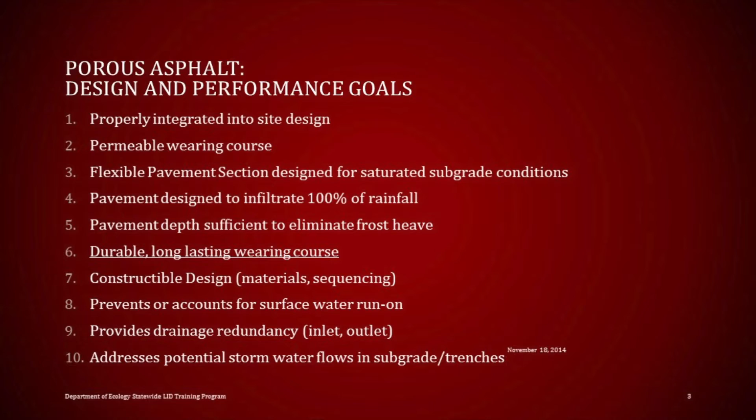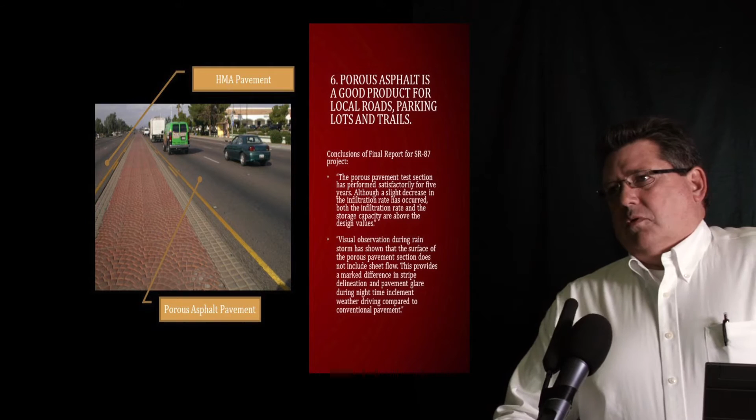As Curtis mentioned, mix design on porous asphalt has been a moving target and continues to be one. You're going to see information today that's only been presented one other time, as an example of how this keeps moving. In general, everybody's been pretty accepting of porous asphalt being a good use for local roads, trails, and parking lots. But we have an example in Arizona of a fairly high-volume highway using porous asphalt, and there are other examples in Texas and elsewhere where porous asphalt is used on high-volume roads.

As a note, this is from a report on this particular road at the 5-year point, showing they were maintaining the design porosity 5 years into the project. It was operating satisfactorily at the 20-year point. I don't know what it's been doing since then, but it was operational. If you notice in this picture, there's very little visual difference between either side of the road—one side is regular HMA and the other is porous.

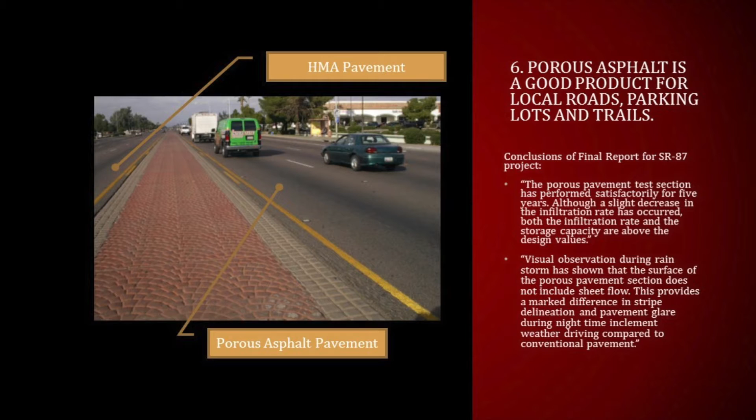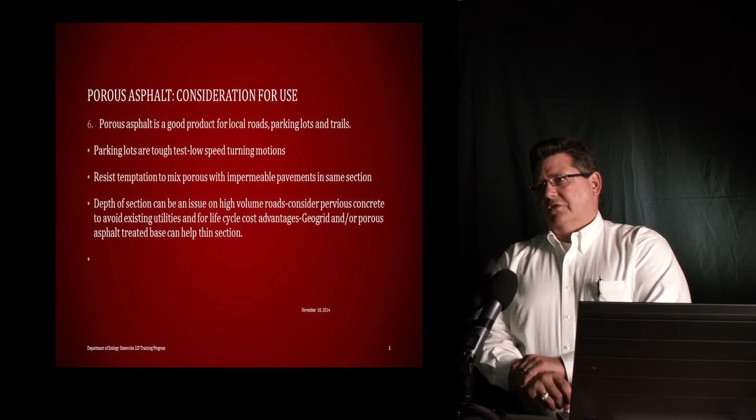Everybody wants to use porous asphalt for low-speed applications, like parking lots, and that tends to be one of the toughest applications because of those low-speed turning motions. If you've been in a parking lot, you've seen regular asphalt has a tendency to ravel a little bit—porous asphalt just a bit more so. Some of the things we'll discuss in the design process will help reduce that effect.

Curtis already mentioned resisting the temptation to mix porous pavements and dense graded pavements, and I totally agree with his opinion on that—we want to restrict that as much as possible. If you do have transitions, do them at the crown, or find other ways to intercept that impermeable flow so you're not clogging your pavement.

One thing to keep in mind with porous asphalt that makes it different—and I'll be comparing and contrasting it a lot here to pervious concrete—is that pervious concrete, being a rigid pavement, has a totally different design concept than porous asphalt and other permeable pavements as flexible pavements. When you get to high-volume roads and you're already assuming a basically poor, saturated subbase, you're designing conservatively to bridge that subbase. So your pavement sections get thicker and thicker with porous asphalt, almost exponentially as you start talking about heavy truck loading and heavy volume loads.

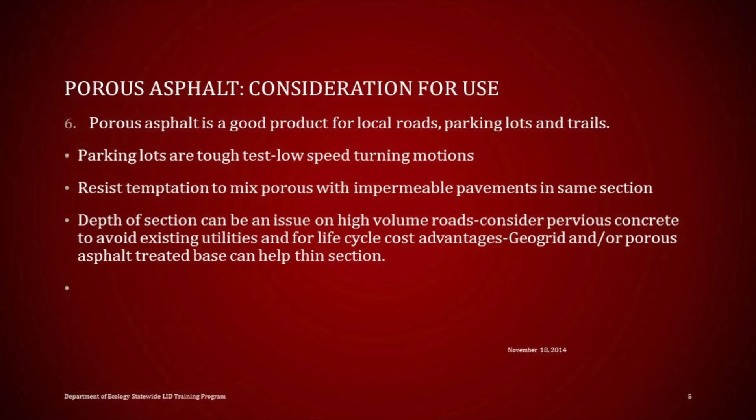So on arterial roads, porous asphalt can become somewhat less cost-effective, especially when you consider life cycle cost versus pervious concrete. Those are things you'll want to think about when doing your treatment or design for pavements.

For example, in the City of Puyallup, where we're doing porous pavements on arterial roads, we're going with pervious concrete, and on local roads or other low-volume roads, we'll use porous asphalt. But if you want to thin the section, you can use Geogrid or a permeable treated asphalt base, both of which add structural strength. The porous asphalt treated base has the advantage of removing the choker course, which has traditionally been part of porous asphalt design for many years, and gives you a much more stable base to work on with your paving machines.

And that's a critical thing. You're getting two benefits out of that: a more stable paving surface, and structural strength. So that's another way to thin your section down somewhat on porous asphalt sections.

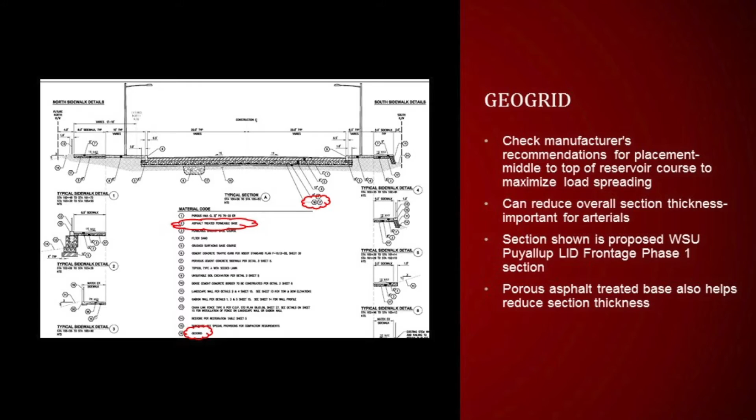Just an example, this is a section taken from our WSU frontage project. We're working with WSU Puyallup to do some more experiments on water quality treatment. As Curtis mentioned, we're trying to confirm that water quality treatment does occur within the pavement section itself. This particular portion of the project will have additional testing to supplement what's going on at the WSU LID site in Puyallup.

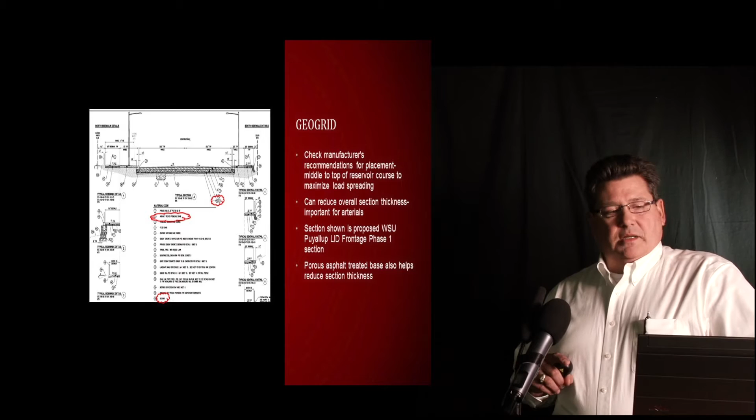But on this, we also had geogrid. This is an arterial road, and we're not using pervious concrete on this particular site, primarily because we have about a 4 or 5 foot layer of peat about 10 feet down. With that kind of surface underneath, there will be a lot of differential settlement, so we didn't want to put a rigid pavement on top of that. So we will be using porous asphalt for this section where we have that peat condition deep down underneath.

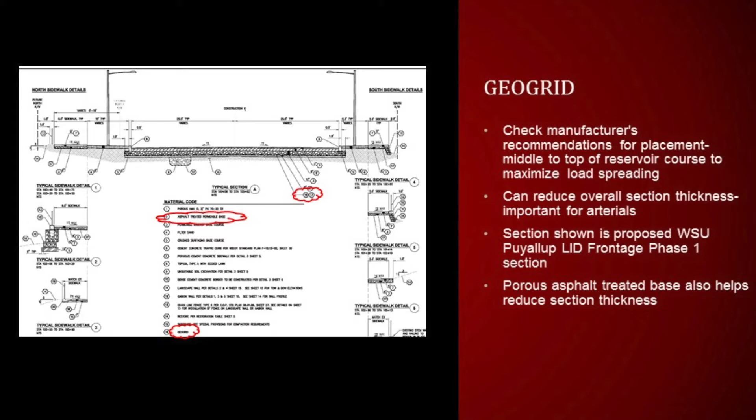You want to check with your geogrid manufacturer as far as placement. Typically you want it up higher in your pavement section so it has a better chance of spreading that load out over the weakened subbase, but that can be anywhere within your reservoir course.

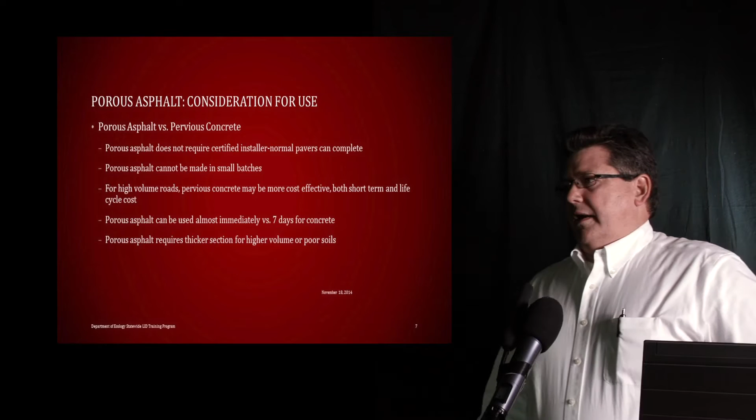So another compare and contrast between porous asphalt and pervious concrete: one thing I like to keep emphasizing is basically once you've got your mix design right on porous asphalt, any paver out there can go and install it. It really is no different, other than a couple minor differences, than any other standard HMA pavement. Once you get to that point, you're pretty well set.

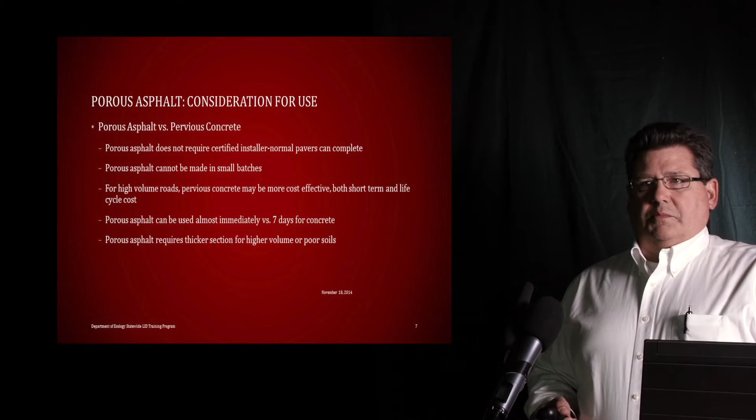The disadvantage with porous asphalt, at least now when it's the exception rather than the norm, is you're really not going to get it in small batches. So when people want a driveway done in it, you're probably not going to be able to do that unless they can tack onto a big run of another project somewhere else. I've been told many batch plants consider 40 or 50 tons about the minimum they'd even consider - that's quite a bit of asphalt, and you're probably not going to get that for your driveway unless you've got a really, really long one.

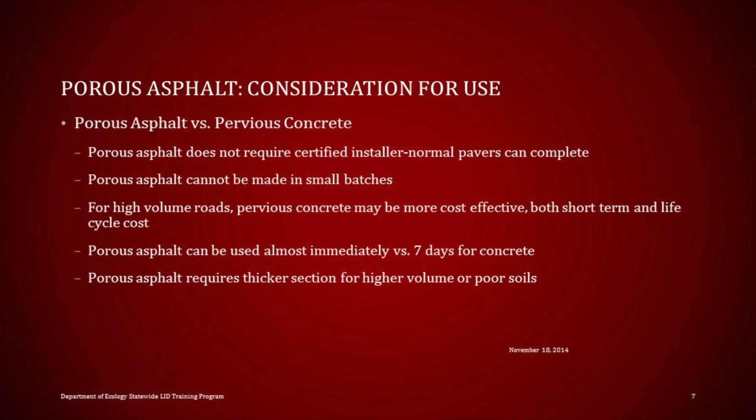As I already mentioned, high volume roads could be more advantageous for pervious concrete, and we've actually made that determination in the city. So on high volume roads, you might want to look at pervious concrete, which Chris will be talking about after me.

One thing when we're working on arterials - the one we're looking at in the city of Puyallup is 39th Avenue Southwest, which happens to run right in front of our Costco. They're not going to be too excited about having that road shut down for 7 days while we let the concrete cure with plastic covering on it. So intersections on that project will be dense graded high early concrete, so we can get that poured and back open within a couple of days instead of 7, so we don't shut down Costco and have them scream. That's actually a big source of revenue for the city, so I'd probably get a lot of pressure from other places on that too.

So things like that need to be considered when looking at pervious concrete, along with a thicker section for higher volume and poor soils.

Continuing on the theme of specifications, there have been a lot of varying opinions on specifications for porous asphalt. Jessica Knickerbocker from the City of Tacoma, along with a large group of other industry and municipal parties and WSDOT, are working to develop a standard specification that everybody doing municipal work using WSDOT specs can put into their specs and use with confidence. We're getting closer, inching forward, and hope to have that out in the next couple of months. We'd actually hoped to have it out by the Stormwater conference last week, but that didn't happen.

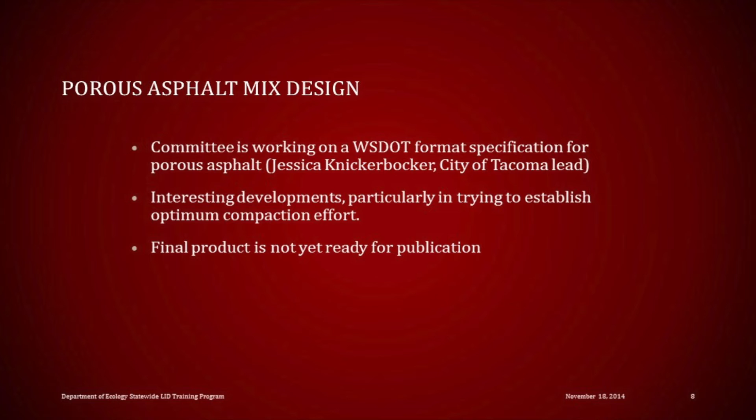And we had a mention of raveling, and one of those things we want to do is use a PG 70-22 polymer modified asphalt. That's a performance grade asphalt that has a polymer in it that helps it be stickier - that's the easiest way to think about it. That polymer makes it so the binder will stick to the aggregate and stay there longer and better. That's actually a key component; we want to have that in there.

You might get some blowback from suppliers on that, particularly if you're in this time of year. It's not necessarily readily available in the November time frame, but you really need to stick to your guns on that one.

The next one that we have a lot of debate on, but based on anecdotal evidence we've had from many different porous asphalt designers from around the country, is that 6% asphalt tends to be a critical element, and I guarantee you every supplier that's out there will try to get you down below that 6%. But as long as you can do that 6% at your 75 gyrations compaction effort, and you can pass your drain down test and voids test, that's where you need to be.

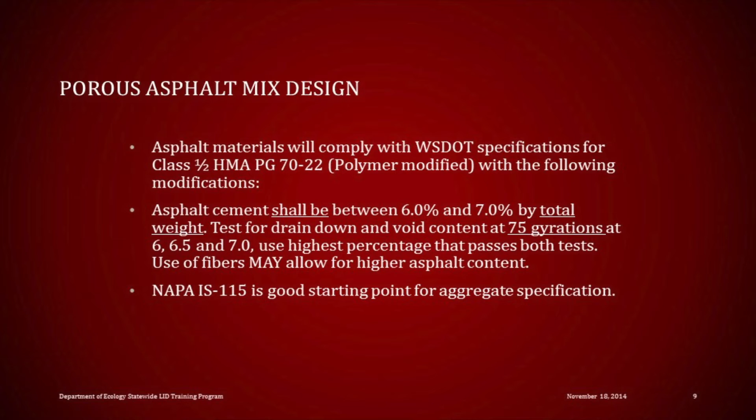There's a couple things you can do to increase that, and adding fiber would be one of those. Adding a little bit of fines to your asphalt mix would also do that - it would thicken the mastic and make it adhere better to the aggregate, so it wouldn't drain down through the mix. Those are things you can do. But generally, this goes towards the durability aspect of porous asphalt - we're trying to improve the durability of the pavement, so the asphalt content percentage is important. The type of asphalt you're using is also important.

As far as the specifications for the aggregate, the NAPA porous asphalt specification is a good starting point. Again, work with your local aggregate suppliers to determine if your aggregate can meet the specification. If not, try to find something that meets the intent - that it has an open graded void content that will allow the asphalt itself to have a void content of somewhere between 15 and 22%.

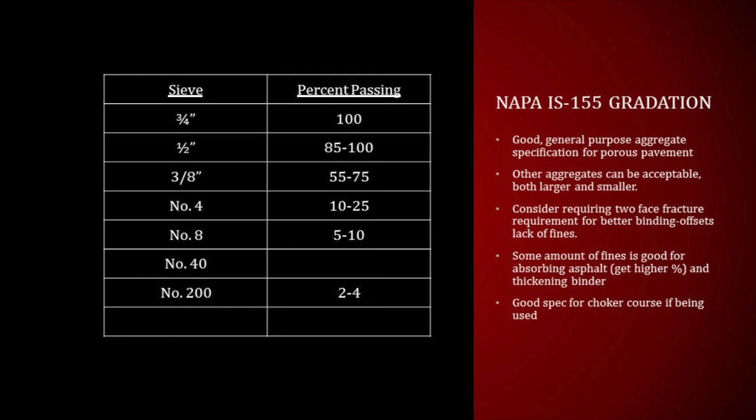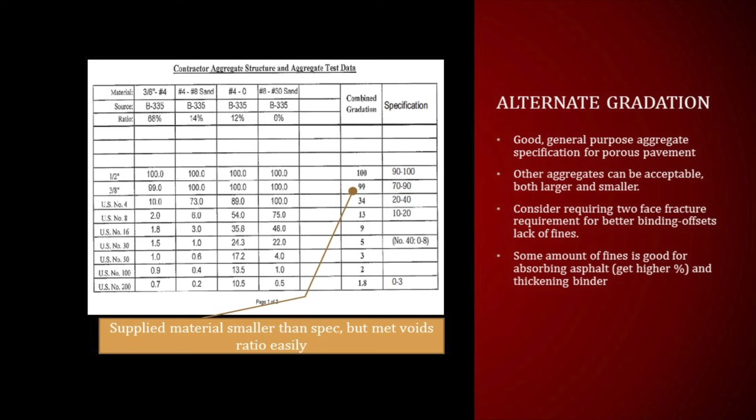You can also use your aggregate for your asphalt as a choker course as well, and that makes it simpler. If you're specifying one rock, it makes it simpler for you, and that will work as well. I'm just showing here that you can have different size aggregates to use in your mixes, and they can work. This was one that was specified on a project I did in Tumwater, and that was successful.

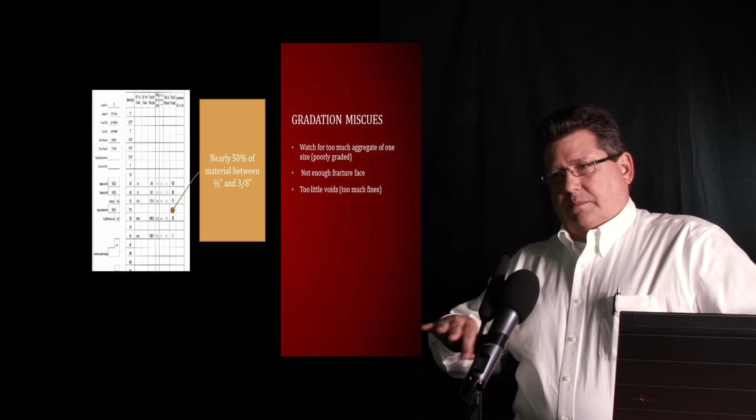It's a little bit smaller aggregate, but it worked out fine - just need to be careful when you look at those to make sure. As far as using these on a choker course, I'll talk about that because it's kind of unique to the porous asphalt section. What you're trying to do with the choker course is give yourself a stable working base. That large reservoir rock is hard to work on with paving machines - it can act like a bunch of marbles, roll around, and cause a lot of rutting. So you want to make sure you have something to set up your pavers on if you're going to use rock, and this is just one option.

In this particular case, almost everything was between the 1/2 inch and 3/8 inch size - that's not a wide range, and we had nearly 50% of the rock in there. When you do that, you don't get good interlocking, you don't get a good firm base - you actually get something that looks more like that. And that's what happened on that site in Tumwater, so you just got extreme rutting. This is just pickups going across here, not dump trucks or anything else. It was just, like I said, a bunch of marbles rolling loose.

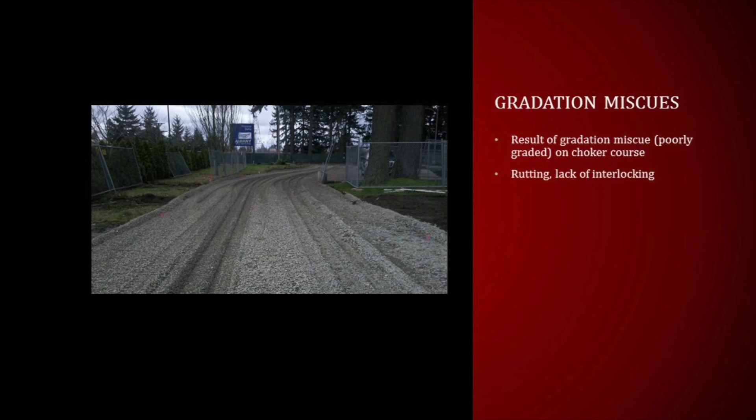You could actually amend that and put a correct gradation back in, mixing it with the rock in place. We did that in this particular case, and we were able to solve the rutting issue and got a good firm base for that. The caution I have as a designer is to look at your rock when it's submitted and actually put it on a chart similar to this, so you can see what your specification is and where your rock is lying.

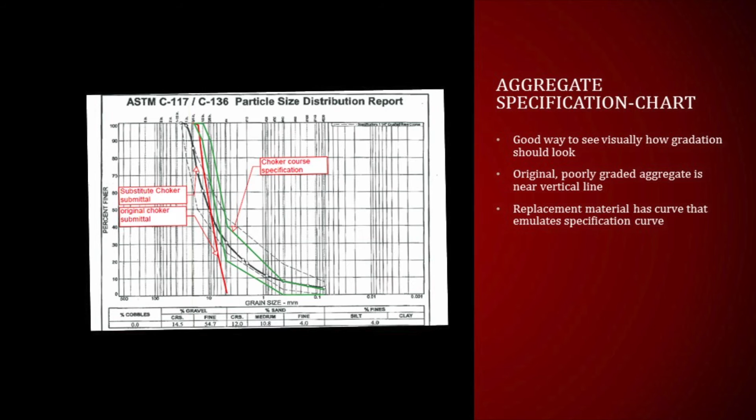If I had done this, we wouldn't have had that problem on that particular site. The green is the choker course specification, so the rock should have been falling within that on the sieve test. As you can see, the red line is what we actually received, and it just went way out of spec and dropped off the face there.

It's an indication it was pretty much all one size. The contractor came back with something that was a slightly larger aggregate, but basically had the same gradation curve, same shape and slope, and that one actually worked very well, even though it wasn't exactly what we were looking for. So look carefully at your materials when you're specifying it.

As far as the mix design itself, you want to be looking at air voids in your mix design at 16 to 25%. I would recommend staying towards the lower end of that. We tend to have excess permeability in the asphalt pavement and concrete pavements we're designing, so I'm more concerned about your durability and trying to get it closer to that 16% rather than the high end of your voids.

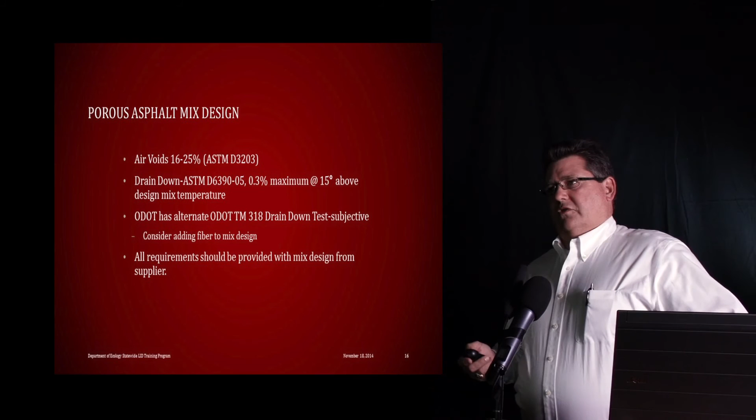You're going to have more problems with durability issues than you are with the actual draining of the pavement and rain. Drain down, there is an ASTM test for that, which is listed here. You only want 0.3% maximum on that. Noted, 15 degrees above the design mix temperature is what you test that at, and I'll show you that in a minute.

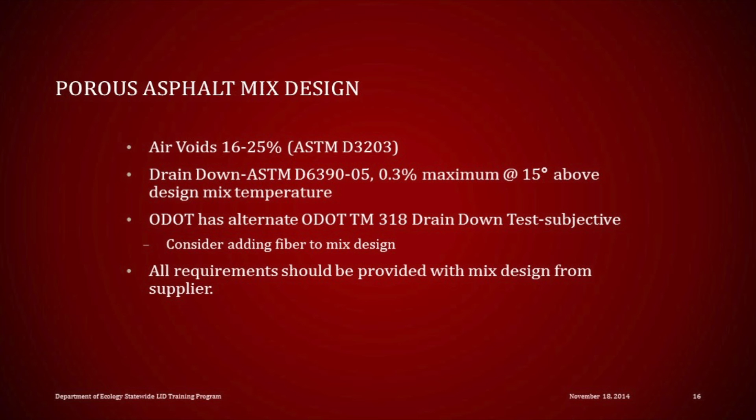Oregon Department of Transportation has an alternate test they use, which is more of a Rorschach test. They put the thing on a piece of paper and pull it back off and take a look, see how much asphalt actually came onto the paper. That's a very subjective test. I wouldn't necessarily suggest using that one.

Just noting that you can add fiber to the mix, and if you do add fiber, it's generally a cellulose fiber for asphalt versus the materials you'd be adding on pervious concrete. You should get all these on your mix design that's submitted to you when you're doing your project from your supplier.

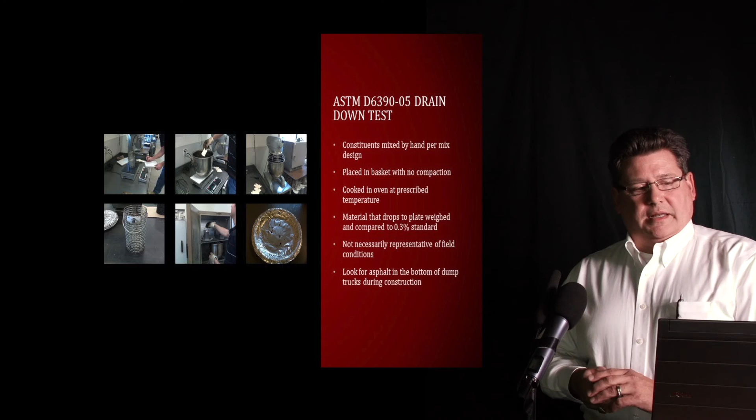Just showing you here the drain down test, the ASTM drain down test, and basically what you're doing is mixing a batch of that asphalt to those specific quantities in the mix design, putting it in an oversized mixer, putting it in the basket on the lower left there, putting it in the oven, baking it inside this metal, having it set on the tin, and then looking in the tin to see those little specks that drained out of the mix.

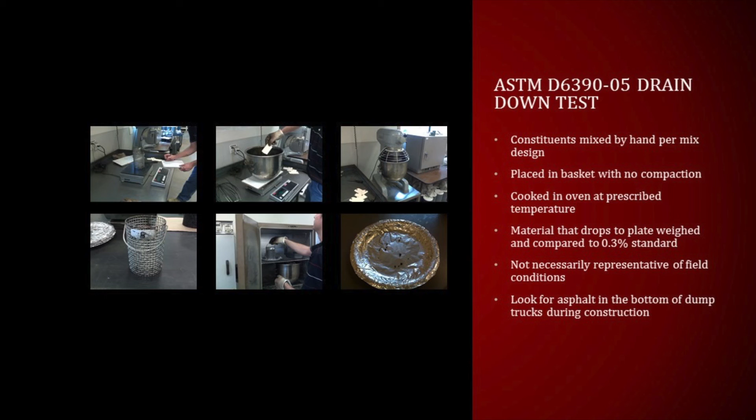This one did pass, but just barely. You can see it doesn't take a whole lot of that asphalt mix coming out to fail your test. So it's a fairly sensitive test, but it's not necessarily representative of what field conditions are going to be when you actually have your mix out there.

So when you're out in the field and you're looking at your trucks coming up to pave, as they dump out into the hopper and pull away, take a look at those truck beds before they come back down and see if you see a lot of asphalt in the bottom. If you're getting a good amount of asphalt in the bottom of those things, you may have an issue with drain down that you need to address.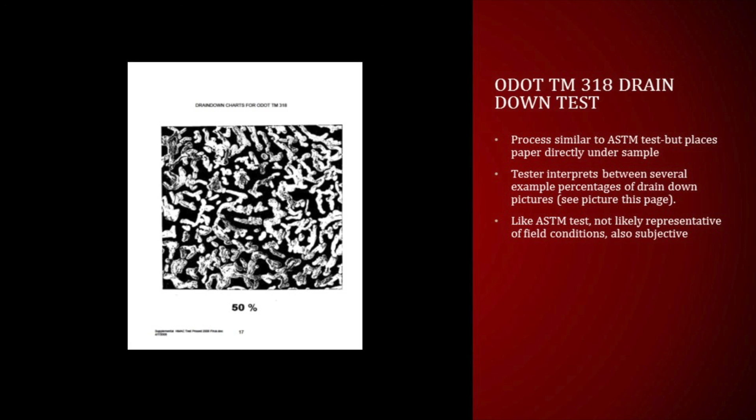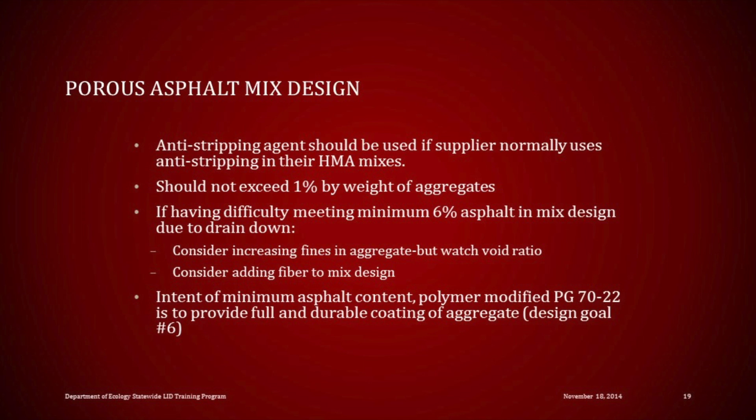Anti-stripping, we've had good discussion. I think we've come to agreement with the suppliers here locally. Basically, if your supplier uses anti-strip in his regular HMA pavements, he probably should use it in his pervious or porous asphalt mix, not exceeding 1% by the weight of the aggregates in that mix.

I keep hitting on the 6%. I'm sorry, but that one is important. So again, resist adjusting away from that and try to do some adjustments to your mix design to get it over at least the 6% minimum to keep your asphalt content up where we need it.